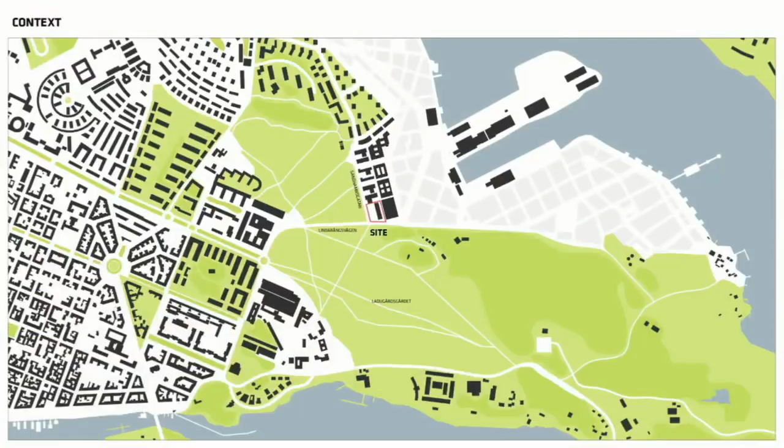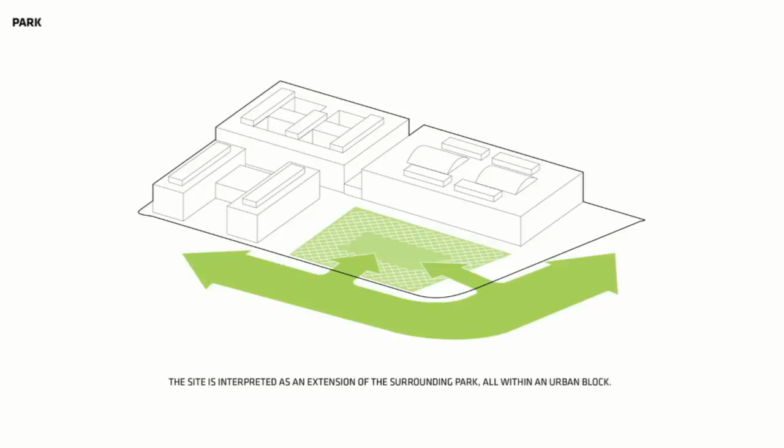Thanks to Oscar, who called us 7 years ago and asked us to take a look at this incredible piece of land surrounded by Gärdet Park on two sides, city on two sides. It became very simple that we wanted to try to make a new kind of neighborhood, a new kind of city block that combines the qualities of the park with the qualities of the city.

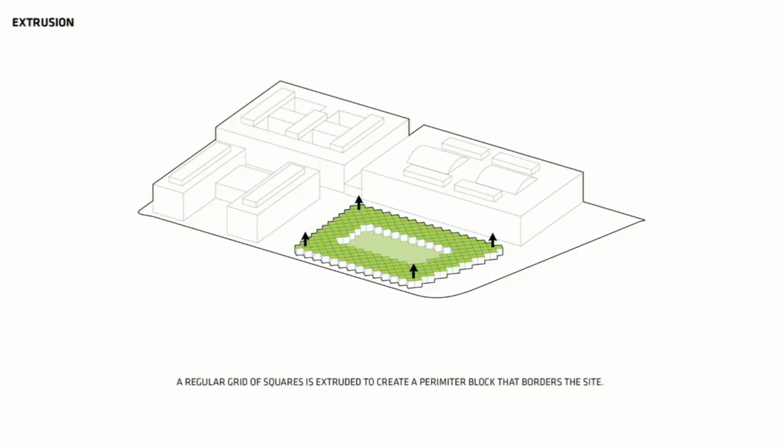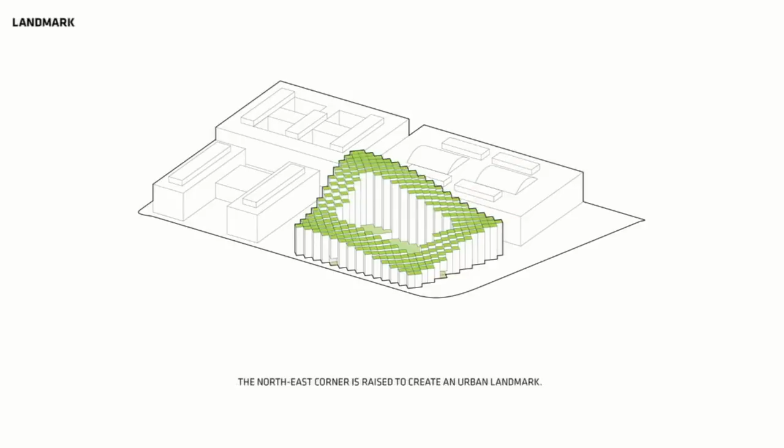So we came up with the idea of this sort of rotated grid, a grid of rooms. The rooms are rotated 45 degrees, allowing views up and down the streets. Passages allow a shortcut across the corner. And basically we propose to push down the southwest corner, lifting up the northeast corner in return, allowing us to flood the courtyard with daylight.

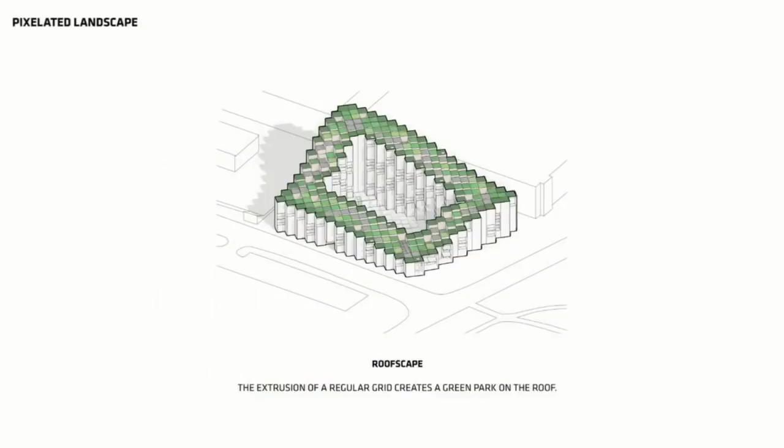This is what it looks like today - this sort of gentle, lazy, sloping landscape. You have the gardens along this cascading landscape, you have the oasis protected from the wind inside. Everybody ends up getting a really joyful view over the Gärdet, over the forest, the hills.

The landscape is not just visual, it has these cascading terraces. Inside, the courtyard becomes an oasis open to the sky, dipping down so you get an abundance of sunlight. And this is also the home for a kindergarten.

For the facades, of course they have different orientations, and we wanted the zigzagging to create a certain intimacy, so instead of being like some kind of address in a big block, you have your own little niche. Each balcony has its own little surroundings, responding to the attractiveness of the views and the exposure to the sun.

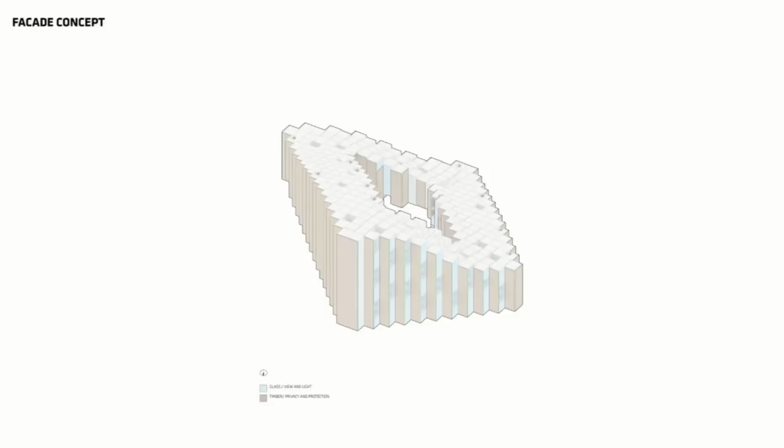For instance, from the northeast, it's almost entirely opaque. Even so, all of the facades are roughly 50% open. It's distributed to match the surroundings.

Also in the courtyard, to avoid vis-a-vis, you get this kind of shade running across the facade. The closer you get to the corner, the more the nice view becomes the other direction. So here you see some of these situations. And the facade is entirely clad in wood.

We like the idea of combining elements that you normally see as opposites, for instance the countryside and the city side. When you go to the countryside of Sweden, all Danes from Copenhagen have a country house there, including my parents, and they're all made of wood. So we thought it could be interesting to apply this material that you normally see at a small scale to the city scale.

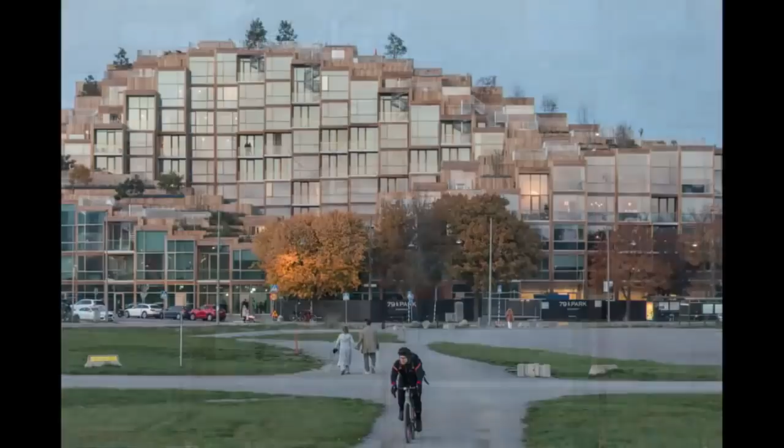Sometimes the louvers are turned to allow views from the balconies while retaining privacy. But of course, from the southwest, the facade is almost entirely glass.

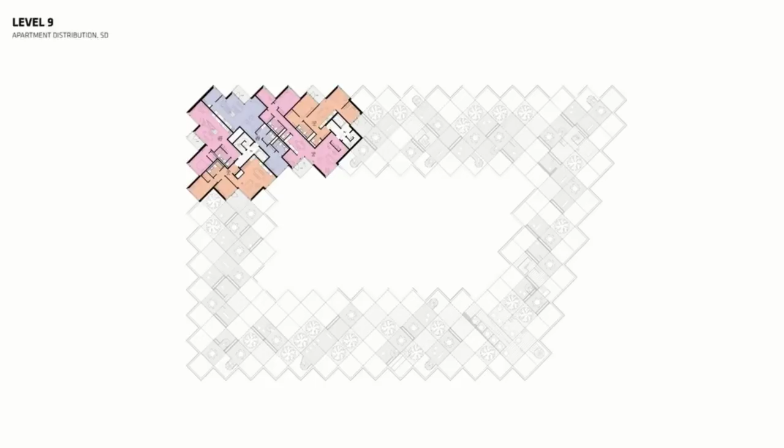So basically, when you look at the plans, in all this organic appearance, it's actually incredibly rational. It's like a single module repeated indefinitely. But as a result, you get apartments that have an almost quirky character.

Quite often when you move into a newly built apartment, it's so simple that it's almost like a cardboard box. It lacks character and diversity.

Here, with the access to the outdoor spaces, you can see the steel is actually exposed inside, so you have the quirkiness you find in a loft that has been converted from industry to living, similar to our own office. There's the warmth of the light filtered through the wood, and even a certain verticality.

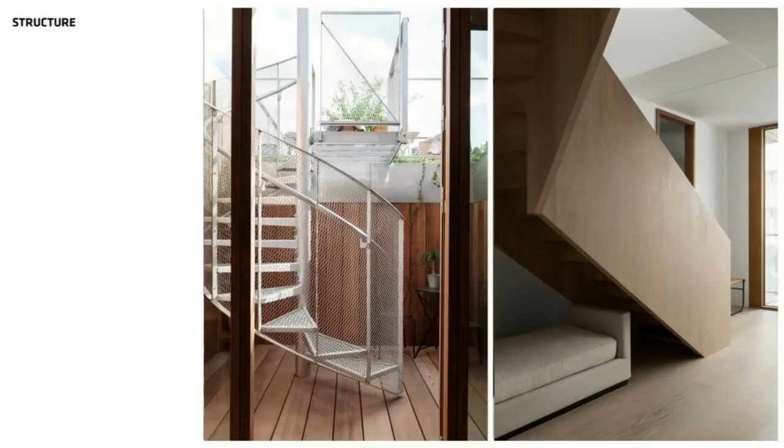Many of the apartments are duplexes, and some of them have access to the roof through these spiral stairs. So essentially, you end up inhabiting a hybrid part of Stockholm that is half landscape, half city.

I think maybe the one image that best captures the intention of the project is this image, on a day similar to today, where you can hardly see where the natural landscape, the rolling hills and the forests, become the city of Stockholm.

Before I leave it over to Rainier, I thought it could be interesting to run through some of the subjects or challenges that we've been dealing with over the last decade and a half at BIG.

We recently completed the home of Lego, the Lego House. The success of Lego is that everybody thinks that Lego is from their country, but it's not, it's from Denmark.

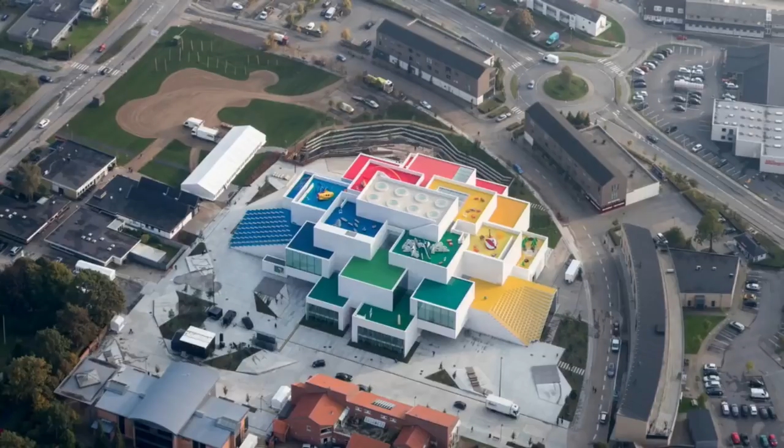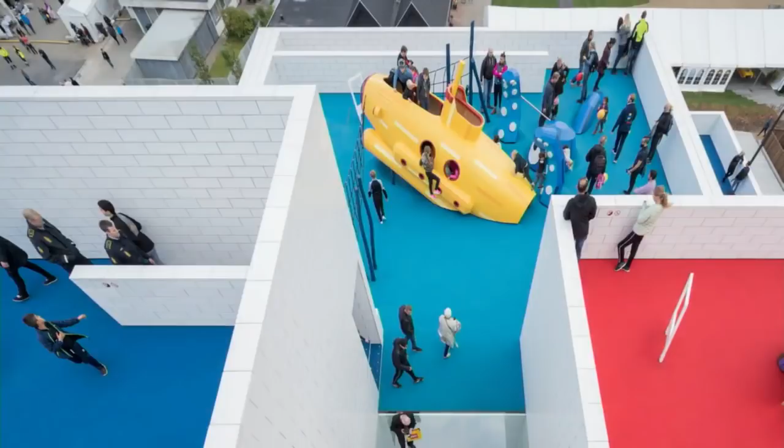We try to make the house as much Lego-like as possible, to make it interactive and inviting. You can actually climb the roofs on these sort of playgrounds, all the way to the top, and you don't need a ticket. It's really an extension of the landscape of the city of Billund.

Inside, you have all these rooms dedicated to different aspects of Lego. It's probably the only museum in the world where you have to touch the artifacts.

The reason Lego is important, I think, is that Lego, to me, is not a toy. It's a tool that empowers the child to create his or her own world and to inhabit that world through play, and to invite her friends to join her in play and in co-creation of this world.

And at its best, that is exactly what architecture should be: that we as humans have the power to create the world we want to live in and make it a reality. As you know, those of you who are native Swedish speakers, the Danish and Swedish word for design is formgivning, which literally means giving form to that which has not received form yet. In a way, to give form to the future that you would like to see happen and that you would like to live in.

And essentially, I think we try to do this at different scales, at different sort of projections into the future. Some of the projects we deal with are more sort of blatantly dealing with this.

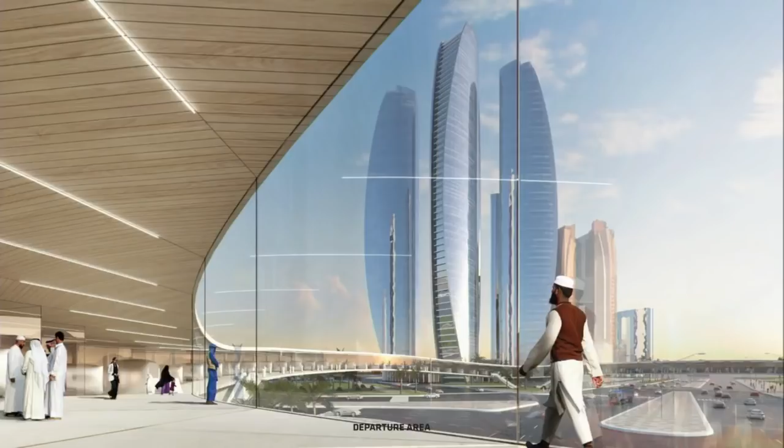We're working with Hyperloop, trying to imagine the future of on-demand, ultra-fast transportation. Among other places, we've made studies for the connection between Dubai and Abu Dhabi, allowing people to travel with supersonic speeds between the two cities, doing in 12 minutes what currently takes at a minimum 2 hours, and hoping to expand this across the entire region.

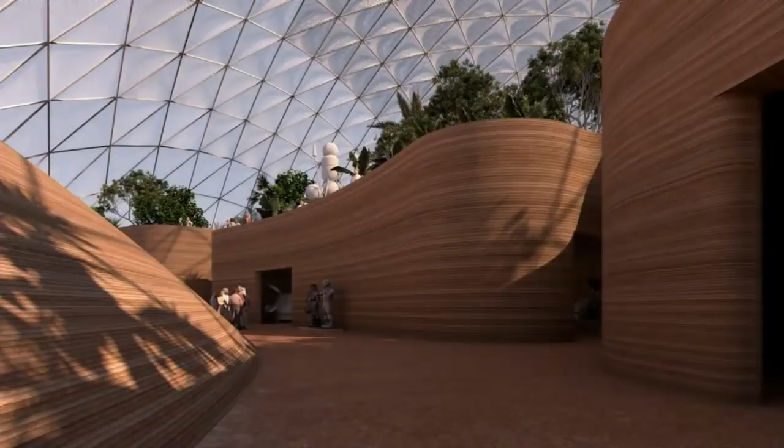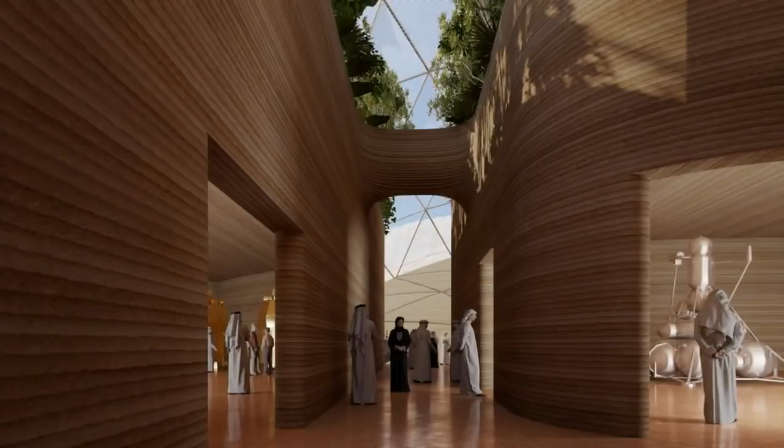And in doing so, we started speaking with the Ministry of Cabinet Affairs and the Future in Dubai, and they commissioned us to do the Mars Science City, where we're creating a prototype of what a human habitat could look like on Mars in the not too distant future, working with 3D printing, using the local materials on site—in this case Dubai—but also creating this idea that living on Mars doesn't have to be like living inside a tin can. It can almost have this Arabian vernacular quality. The texture of the 3D printing and the warmth of the sand gives it this kind of friendly feeling.

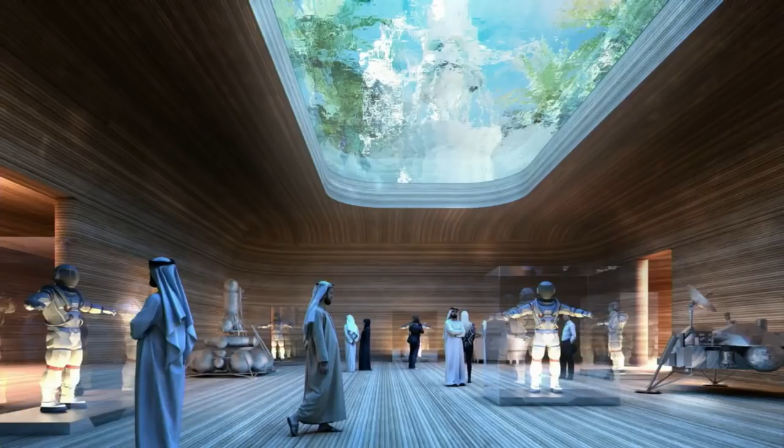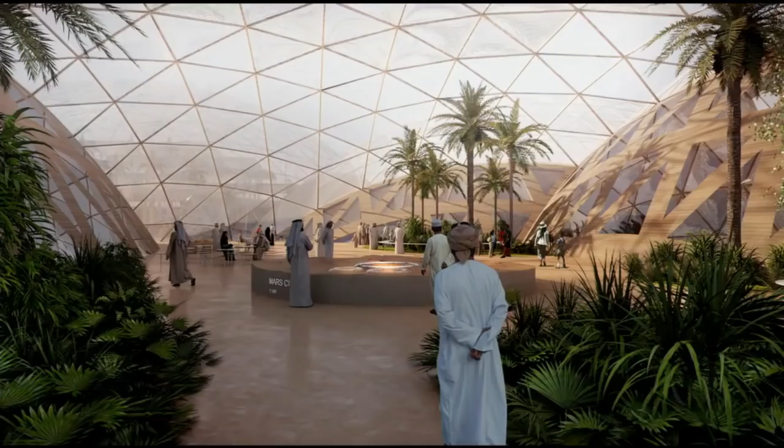Also, to protect from the radiation you have on Mars, the best way to shield the human body from radiation is water—it's 7 times more effective than stone. So just 1 meter of water that allows daylight to pass through can protect from radiation. So we're just starting to place images and understandings in people's heads of how attractive and desirable a future habitat on Mars could be, using aquaponics, hydroponics, creating this lush environment and using it as an exchange of knowledge before we can actually realize the real one, hopefully in the not so distant future on Mars.

But sometimes this idea of the future is much more intimate and much more near to what you know. Our first project ever was the Copenhagen Harbor Bath, as some kind of an idea of hedonistic sustainability—the idea that a sustainable city doesn't have to be this kind of Protestant idea that you have to take cold showers to not ruin the environment. If you have a clean port, it's not only good for the fish, it's actually amazing for the citizens living there. You don't have to drive for hours to get to the beach—you can jump in the port in the middle of the city.

In Shenzhen, we recently opened the headquarters for the main energy company of Shenzhen. The facade is designed like a kind of pleated dress, almost like an Issey Miyake fabric, which means that it's entirely open facing away from the sun, and entirely closed facing the main direction of the sun. With this simple idea, where we can play and increase or decrease the scale of the openings—the main entrance—it reduces the energy consumption by 30%, purely because of the geometry of the building. So in a way, what makes the building perhaps look beautiful also makes it perform beautifully.

In Copenhagen, we've experimented with different hybrids. The Mountain combines a parking structure with 80 houses with giant gardens—a man-made mountain. We created the 8 House, which creates a three-dimensional community, you can say, where social life is normally restricted to occurring at the street. Here you can walk and bicycle all the way to the penthouse. These two little girls live on the 7th and the 9th floor. They don't have to go down and meet in the courtyard—they can just walk over and find each other.

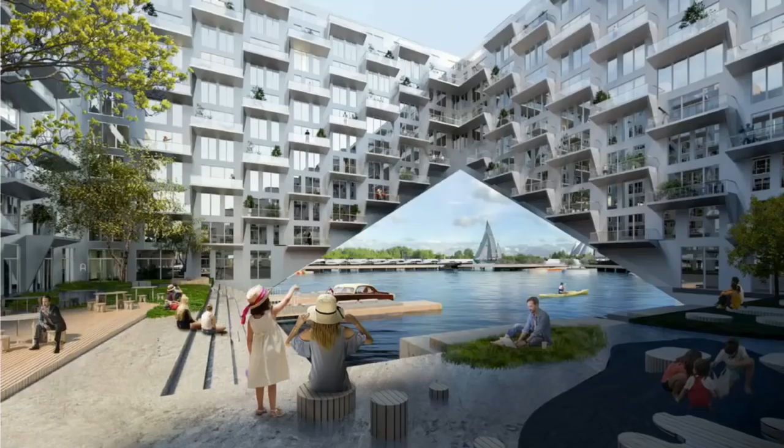As a sort of architecture, there's also an ongoing conversation with the world and with your own practice. For instance, the 8 House in a way inspired a building we're now building in Amsterdam. It's almost like the 8 House upside down. It's basically a city block that allows the port of Amsterdam to extend into the courtyard.

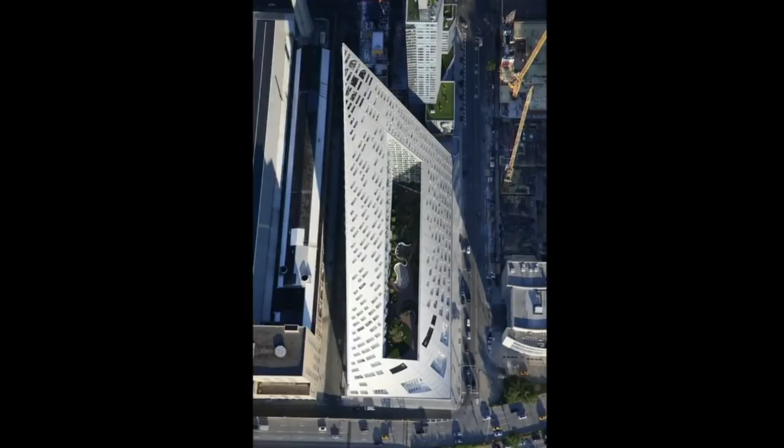So you can actually sail, if you have a good aim, your sailboat into the courtyard. And as another kind of American cousin, we created Via, which we've called a court scraper, because it combines the density and verticality of a skyscraper with the communal space of a Scandinavian courtyard. The courtyard actually has the same proportions as Central Park—only 13,000 times smaller.

Sort of a bonsai Central Park, creating an oasis in the middle of Hell's Kitchen. And then maybe the last class of projects is to leave you with one idea. You're only going to get half of it, because I had a film with all kinds, but there's no sound. And I think to make it like a silent movie would also be really weird.

But a notion we've called social infrastructure. Social infrastructure used to be a term that means how many kindergartens and nursing homes are there in a neighborhood. But we try to mean it much more literally. We all know that a piece of infrastructure, once it gets decommissioned, can become something else—like the Tate Modern used to be a power plant.

We created the Danish Maritime Museum. It's right next to Hamlet's castle, Kronborg. Kronborg became a UNESCO World Heritage site, so they had to put the Danish Maritime Museum somewhere else. It used to be inside the castle. So they said, why don't you put it in the dock where they used to build ships?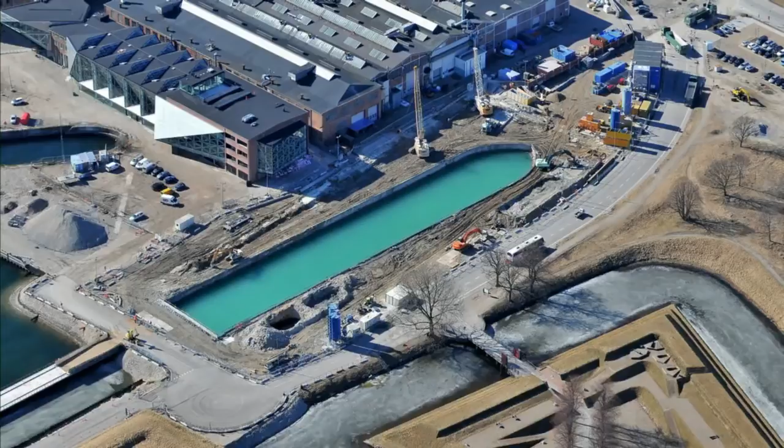So we thought, what if we turn the dock inside out, use the museum to preserve the dock. All we have to do is design 3 bridges: one that stops water from coming in, one that connects to the castle, and one that gently slopes down into this sort of underworld of the maritime industry.

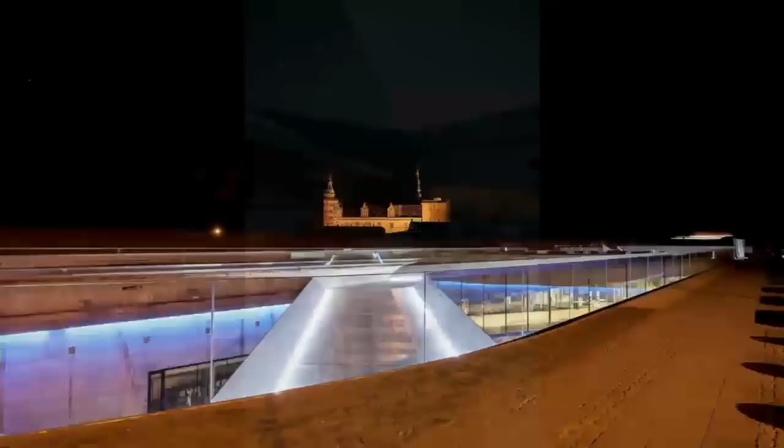So not only is the space inside part of the cultural infrastructure of the city of Elsinore, but the dock itself, with the hard walls and open ceiling, has amazing acoustics for live performances. So basically it has been reinvented to have a new purpose—this sort of inverse Titanic moment.

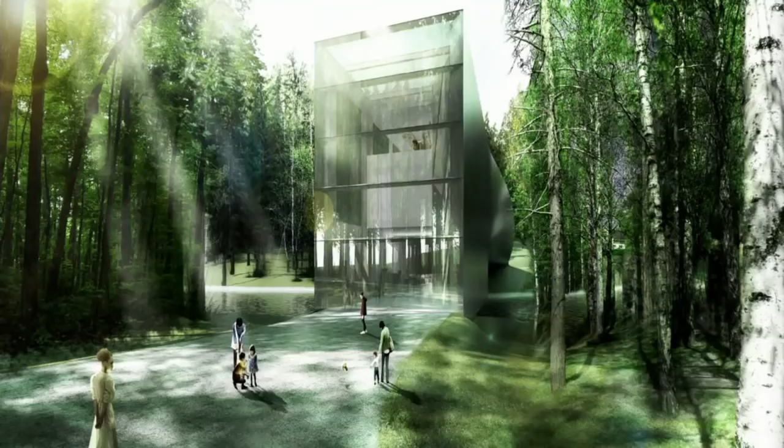But also, if a piece of infrastructure like a dock can become a museum, you can also go the other way. We're building a museum in a sculpture park in Norway that opens next year in Kistefos outside Oslo. We could place the museum anywhere we wanted, and since you have sculptures on both sides of the park, we placed the museum as a bridge, so it becomes part of the journey as you stroll through the sculpture park. You suddenly find yourself moving through the museum and over to the other shore.

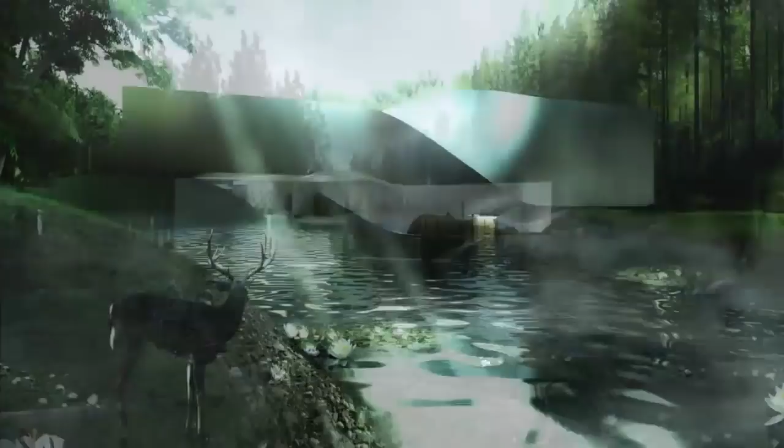But when you see it from elsewhere, you don't even recognize it as a museum—you can almost see it as the biggest sculpture in the sculpture park. And as a last idea, since there are these different interpretations, maybe you don't have to wait for a piece of infrastructure like a power plant or a dock to get decommissioned before it becomes enjoyable.

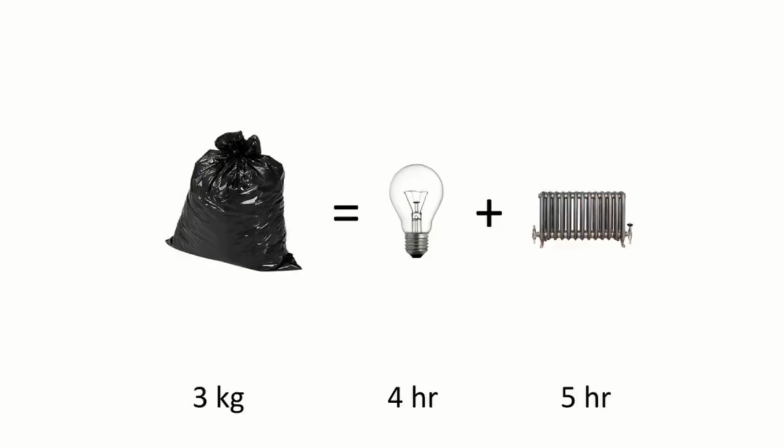It's basically a waste-to-energy power plant. It converts household waste into district heating and electricity, and it's so clean that there are no toxins coming out of the chimney, just a lot of steam. So we thought, how can we celebrate this fact?

In Denmark, we have snow. We have absolutely no mountains—apparently we have mountains of garbage. So to ski, notoriously Danes have to go to Branäs, our closest ski slope. It's like 6 hours in a car, and it's not the biggest alpine ski resort in the world, as you probably know. I think no people from Stockholm has ever been there.

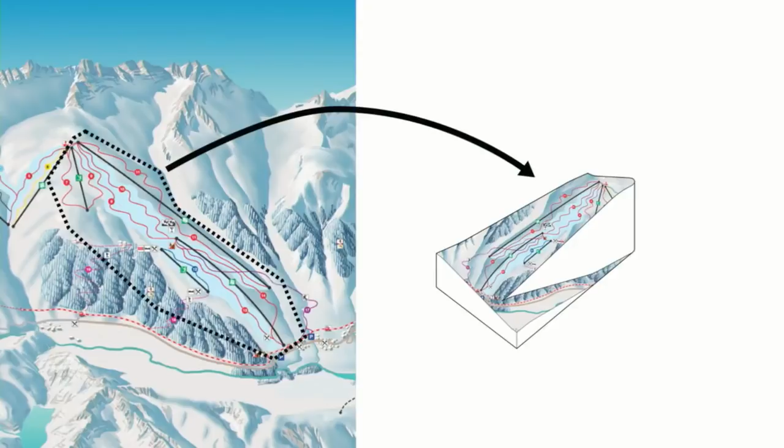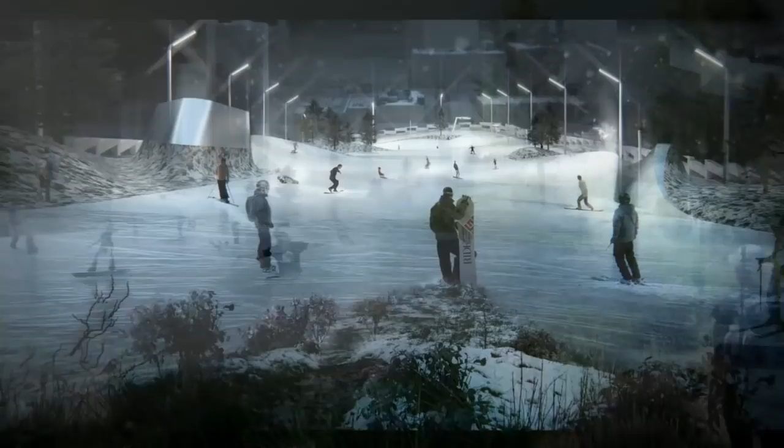But we found out that because of the scale of the power plant, we can actually create two-thirds of Branäs on the roof of the power plant. We proposed it in a competition, and miraculously we won, so we had to somehow deliver on the idea. Also, Denmark won 0 medals in Sochi—we hope to change this now, because now we can actually practice at home. It's going to be a public park, free for all. You can hike in ways you cannot hike in Denmark.

You can enjoy the views of the otherwise flat city of Copenhagen. You're going to have the tallest climbing wall in the world, 100 meters of relentless danger, and it's basically creating, together with the city of Copenhagen, a man-made ecosystem. Because not only can we harvest local resources like rainwater, natural ventilation, natural daylight, but also with the citizens of Copenhagen, it forms almost like an urban metabolism that converts waste into a resource.

This was our first vision, and this is what it looked like 6 months ago. It's scheduled to open right after the new year. So maybe we're going to have Swedes coming to Denmark to do alpine skiing sometime in the future.

So basically, ending on this, I think there is a certain point here, and that is that as an architect, you also have this possibility of giving form to the future. Of course we're not manufacturing the future, we are accommodating it. The future is happening on its own, the way people behave. There's always things changing - it can be a demographic change, an aging population, a cultural change, people migrating to different places, technological change. New technologies have new possibilities. But whenever the world is changing, the way we used to organize it doesn't fit anymore. You get some cracks in reality, and those cracks become opportunities to give form to the future.

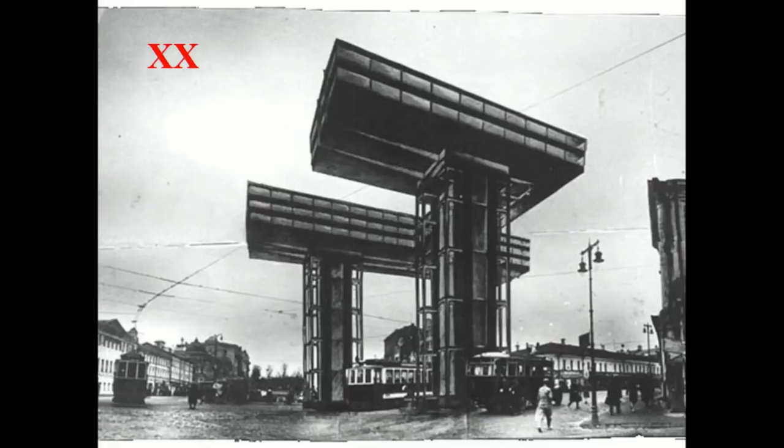In my view, certain profound changes have taken place from the 20th to the 21st century, which are interesting to analyze more precisely because the 20th century and the 21st century look so much alike. In many ways, the 21st century looks like a reincarnation of the 20th century.

One would say that modernity and the modern project simply happily continued a second life in the 21st century: the Vesnin brothers, Safdie, Corbusier in Marseille, Richard Meier in Newtown Connecticut, Gerrit Rietveld in Utrecht in 1924, and Peter Eisenman in New Haven.

Mies' beautiful large onyx wall. What remains in the 21st century is an onyx wall of a somewhat reduced size, for reasons which I can guess you can guess.

It goes on. The University of East Anglia, don't know who this is. And I'm going to say some pretty horrible things, but nothing is personal. To prove that, this is Moshe Safdie in the 20th century.

This is a building nearby. The good thing about that building is actually that it's not the reincarnation of Safdie alone. It's the reincarnation of many things, of brick without being brick, of the Sirius building in Sydney by Tao Gofers. There it goes into the skyline. And in an utterly presumptuous moment, it also owes a lot of its idea to Kisho Kurokawa.

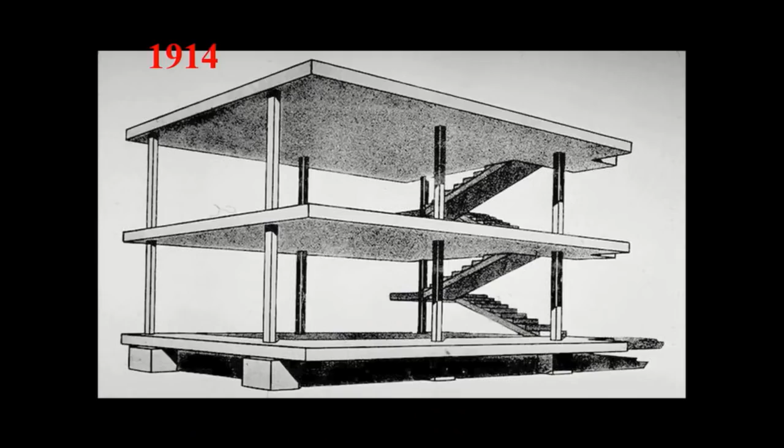So one could say that modernity triumphed. This is the launching pad of modernity, the Dom-ino by Le Corbusier, launching a whole set of freedoms, exploring the freedoms related to reinforced concrete structure, no longer bearing walls, columns, and a free plan, a free facade. That plan is universal by now. It has triumphed, as you can see here, it's built physically.

But the unfortunate thing is that, strangely, this is a picture of a Greek website which is not about architecture. It is about the many tax breaks you can get from leaving a building unfinished. So the modern paradigm actually exists in this day and age as a tax break. And so the triumph is doubly edged.

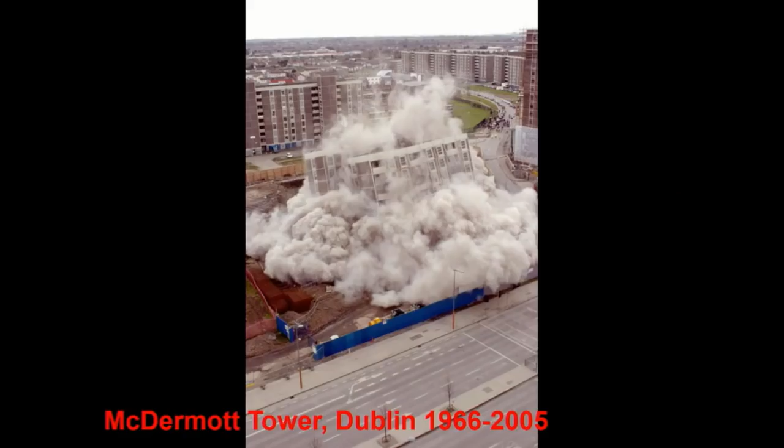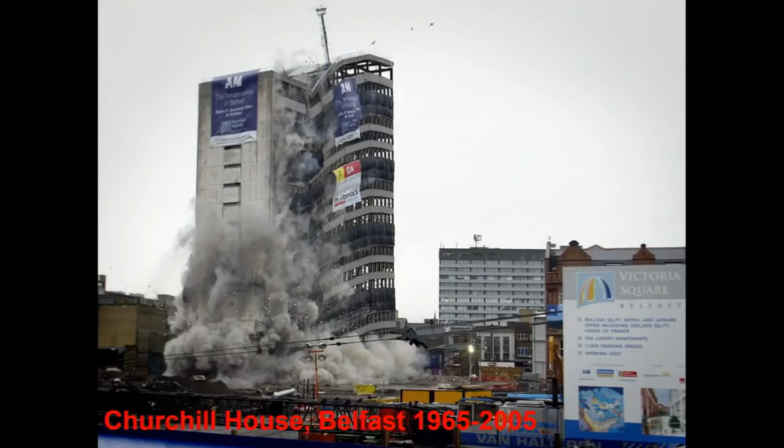It's very good that there is a reincarnation of buildings from the 20th century, because a lot of buildings from the 20th century disappear. This is the first one, Pruitt-Igoe, 1972, Lyon, Sheffield, Chicago, sort of Einstürzende Neubauten, Naples, Paris, etc. I could do this all evening, but it ends. Nantes, France again, Belfast, Glasgow, Lyon, Vitry, Glasgow again, Frankfurt, etc. A lot of stuff disappears, so it's good that there is a recycling.

It's a form of new architecture, a form of preservation of buildings we demolish. There is a curious trend going on: in the Middle Ages, we built for 500 years, then in the 19th century for 200 years, and now for 50 years.

More recently, we built buildings that are supposed to last for about 20 years, and it is not unimaginable that time will overtake the expiry date of buildings. So planning, from a prospective activity, becomes a retrospective activity. In other words, you do not plan the construction of a building, you plan its disappearance.

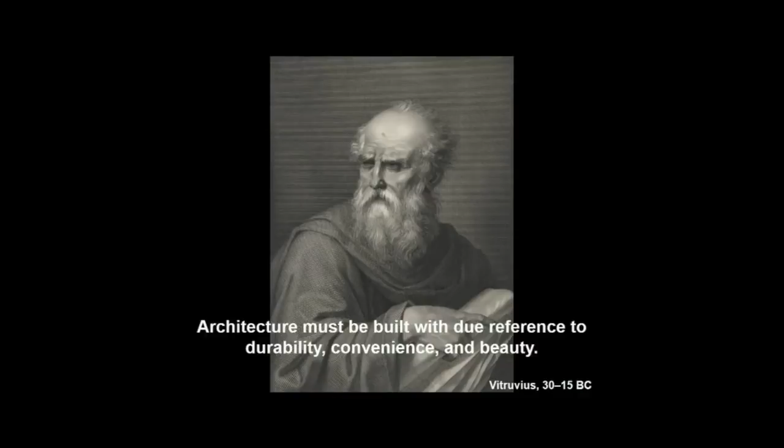It's just a little theory, and it's a theory that, of course, is completely antithetical to the philosophy, a 2,000-year-old philosophy of architecture. You know what this is? This is Vitruvius. His main pillars of architecture: durability, convenience, and beauty.

And that ethos basically, regardless of the stylistic changes, hasn't changed over the centuries. Alberti celebrating the eternal nature of architecture. Ruskin celebrating the fact that buildings should last for more than one generation. And even a contemporary icon like Frank Gehry talks about timelessness.

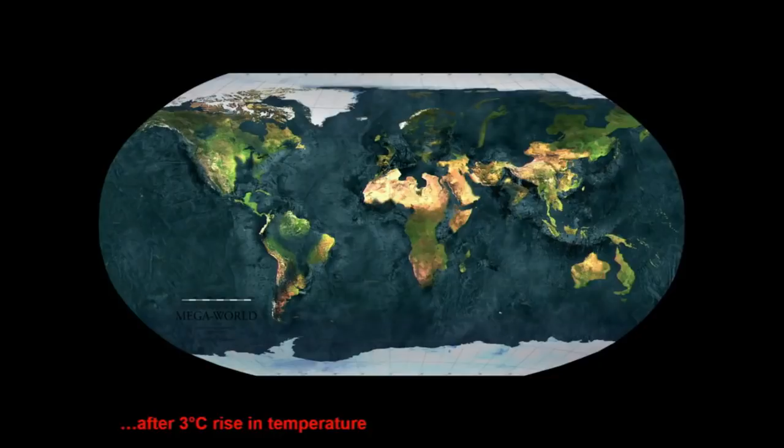But how apt is that ambition? And how true to the current times is that ambition? Because there are two major trends that currently dominate the world, and everybody deals with them: climate change and urbanization. The climate change effect is well known. If Al Gore is right and you visualize it, a smaller part of the world will remain.

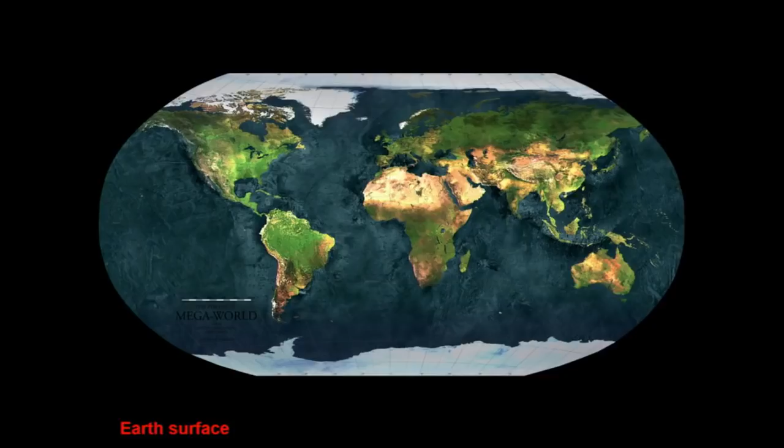But there is another inconvenient truth running in parallel, and that is the trend of urbanization. This is again the same world map, the Earth's surface. This is the part of the Earth that has more than 25 people per square kilometer, more than 50, more than 125. This is, in a way, the megacity regions in which more than half of the global population lives now.

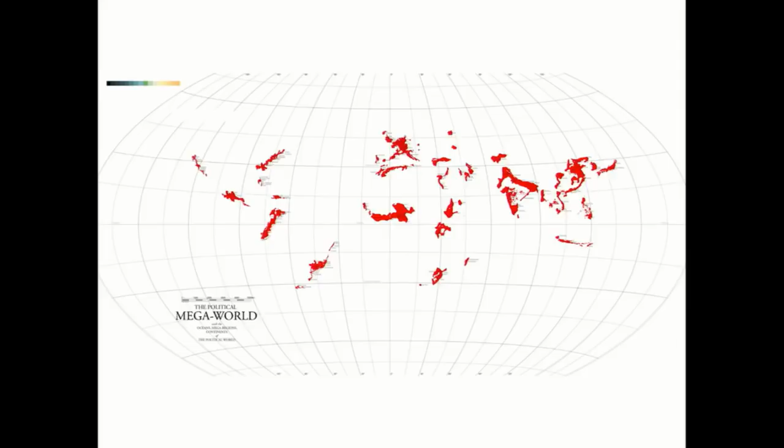It's about 3% of the Earth's surface, with nearly all of its population living there. So the world we know has shrunk. It's, in a way, an archipelago of megacities. That is one way to look at the outcome of the trend of urbanization. There's one unfortunate thing: both trends are known, but if you juxtapose both trends...

Unfortunately, climate change and urbanization means that all future cities will be in the water, protected at enormous costs with increasingly bigger sea defenses. I live in a country that spends 1.3 billion a year on staying above water, and that's only going to become more. So I wonder, what are the consequences for architecture of this trend?

And is it time that actually the main pillars are re-evaluated? So, not durability but temporarity; not a use, but essentially a building fit for any use; and a form of discreteness instead of beauty. In other words, this architectural ideal turns into this architectural ideal.

It is important that a building can disappear. That's the main architectural quality, is its disappearance. It should be used for what it is, for what it was not intended to be used for, and essentially should be constructed at any given place, which is in a way a violation of the three tenets.

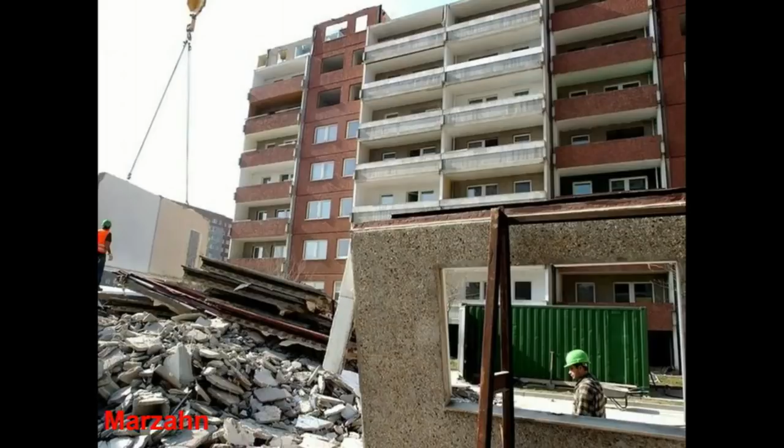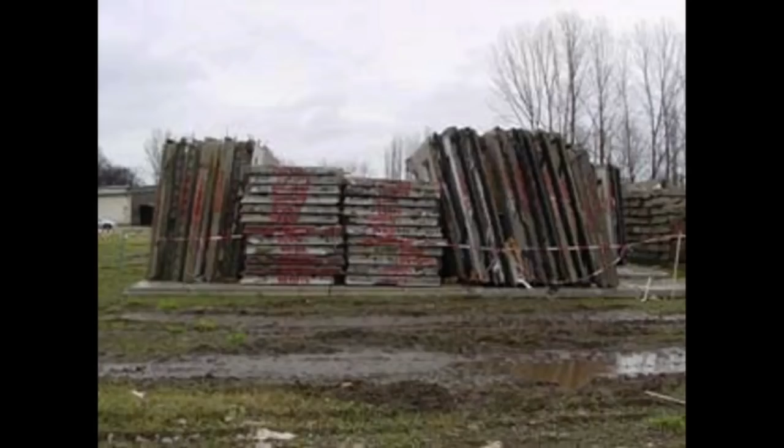This is Marzahn in East Germany. The interesting thing about the demolition is that it's playing the film of its construction backward, and you end up with the same spare parts, collected, shipped and used for a different purpose, reincarnated in a different type of architecture, considerably more modern than the architecture it replaced.

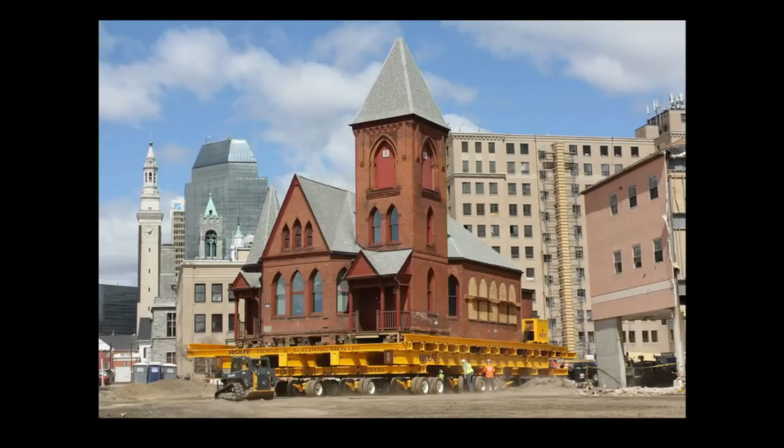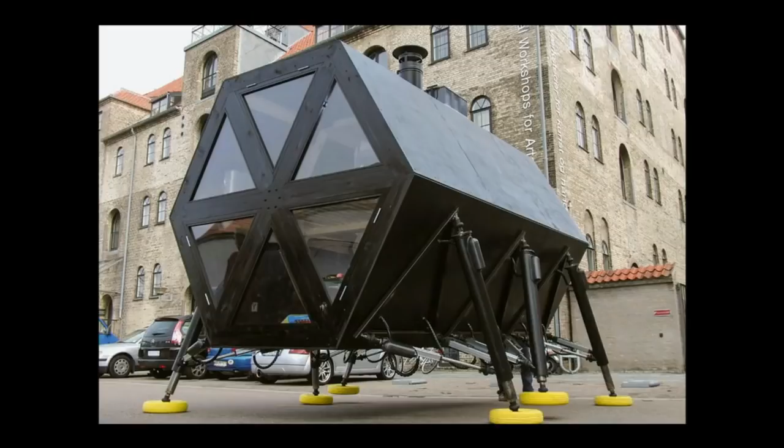In fact, again, a kind of placeless architecture, an architecture that's easier to move. You can move entire churches. Once you move things anyway, the means of transport and the real estate may as well merge into the same thing. So this is a truck as a house. This is a ship as a house. This is a kind of walking house, and maybe entire cities should walk, which is again a reappreciation of the Ron Herron thing in the 1960s.

But I think by far the most... I think I've lost everybody, no? Okay. Anyway, I think the most interesting revolution of all is the following.

This is, I'm told, the Swedish word for real estate, which means fixed goods that stay in one place. So I have a new copyrighted Swedish term: this is lösighet. And the interesting thing about lösighet is the following.

If you look at real estate as an asset class, it is the most important fixed asset class to counterbalance the financial system in the world. More than gold, more than oil, more than anything else, our value is represented by real estate. When buildings change hand, like the Gherkin in London, they triple, quadruple in value.

They accrue value in an incredible way. That's part of the reasons why a lot of housing has become unaffordable. So when fastighet becomes lösighet, we can perhaps mirror the Foster diagram and in a way get rid of property.

Nothing personal here either, these are all Dutch. Essentially, the temporary nature of architecture means that architecture should be at the forefront of a new revolution for equality and all kinds of things.

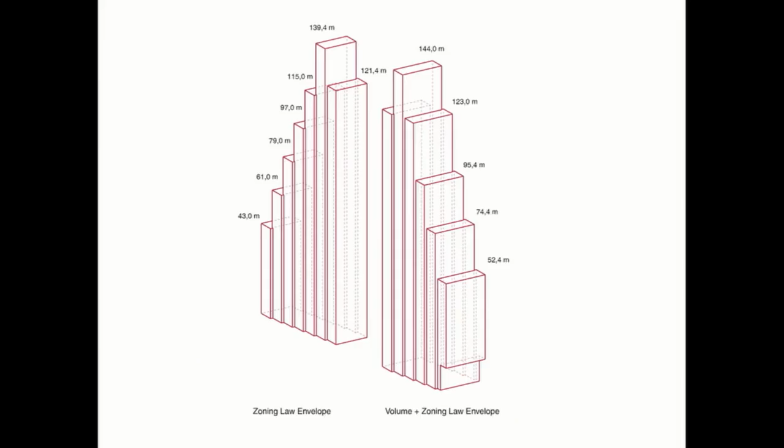This is a project we did in Sweden where we inherited an envelope of a previous architect, which we manipulated into a new form that became these buildings with panoramic windows, a recessed balcony, and the color palette, prefabricated. You sort of get it.

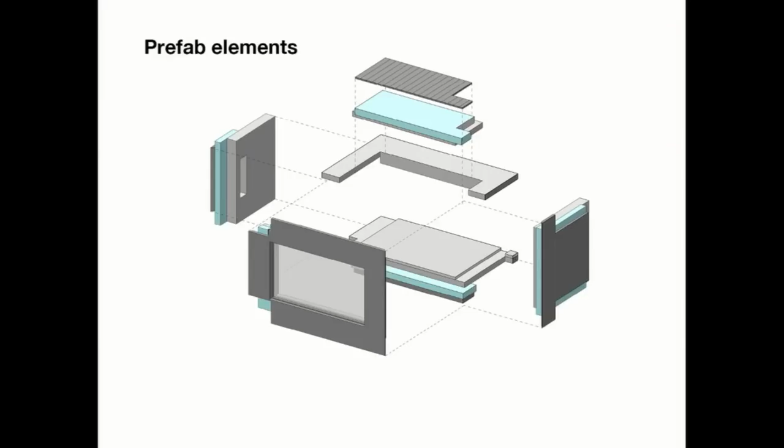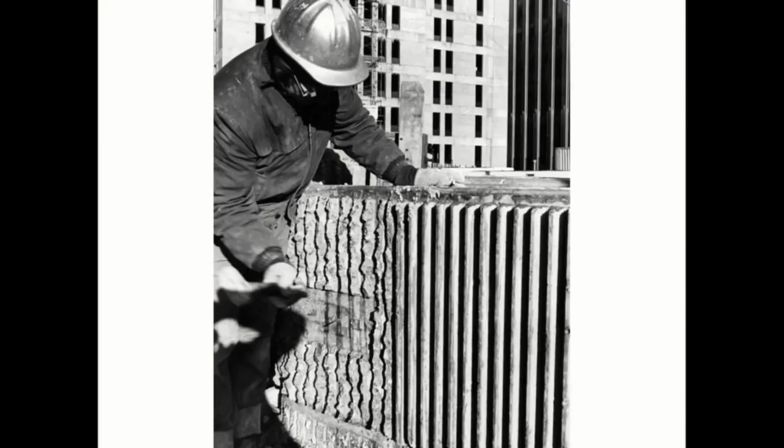The color corresponding to the colors of the neighborhood, obeying the prescribed palette of colors to be used in a system, concrete that looks like brick, but actually concrete that is rough, a building that is rough, there's panels, ribs, with brushed concrete, multicolored aggregate pebble finish.